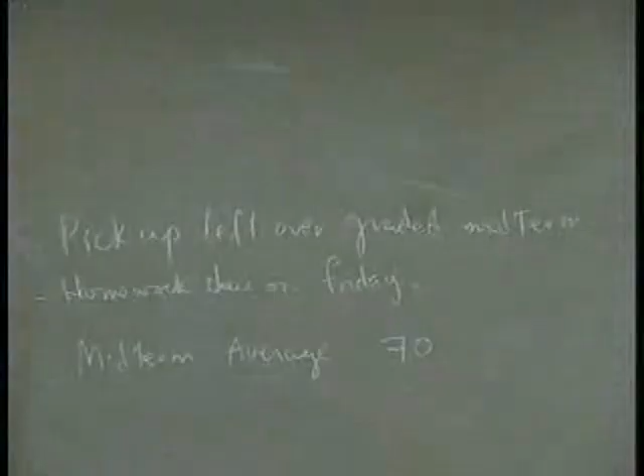Fartin. Sirit. Sahuratin. Secret, no, okay. Valerie Chang. Amin. Mitchell Cow. Mingong Kim. Andrew Chang. Stephen Lanziera. Radford Big Zhuang, Radford Ray Wang. Liying Chang. Liying Chang, Portia Jones. That's you? Okay. Jingua Wang. Could you pass this on over there? Ted Lee. Sean Koo. Joyce Liang. Alan Gu.

Oh yeah, there's a two-part thing. You're right. Hey Cam.

There's one without a name. You never figured out who it is, did you? Or is it the person next to Aaron Floyd? Oh yeah, sorry, this is... that's okay. Aaron. Okay, Aaron Floyd.

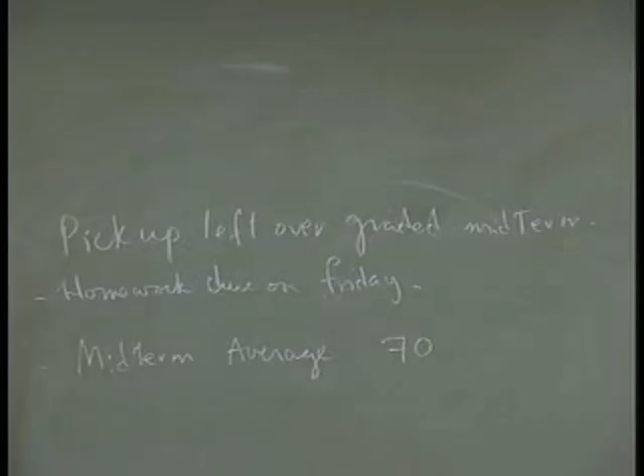Yeah. You're Tiffany, right? I don't think I read your name. Oh, what? Okay.

It's possible. Did anybody else by accident get Tiffany's? There's only one guy somewhere in the middle, like yours was not stapled. Did Tiffany's come with that? How did you have? What happened? Okay, don't have much of an explanation for that.

And this is your graded homework also. Okay, so I think that overall you did okay. I mean, there were times people didn't complain nearly as much as you did, and in previous times I taught the course, the average was still 70. In fact, 70 is right on - that's exactly how you want it to be. You don't want the average to be 95, and you don't want it to be 35. You want it somewhere between 60 and 80, or the 70 range. So I'm pleased with the results.

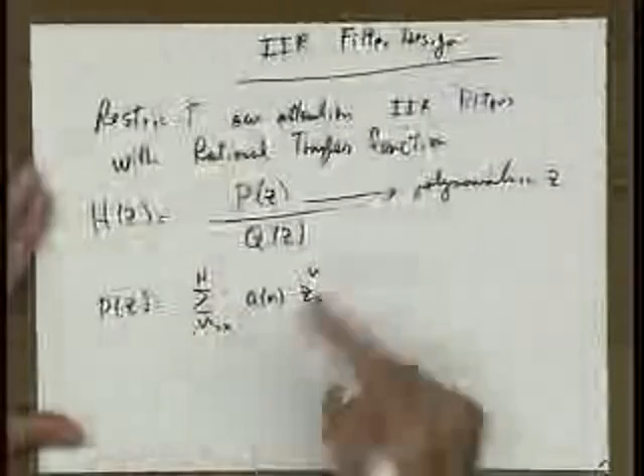So essentially, filter design reduces to this: where this summation is not infinite, this polynomial has finitely many terms, n equals 0 to capital N or something like that. Then the filter design reduces to determining these coefficients. Filter design is equivalent to determining these coefficients.

The same thing with Q. If I have Q of z is the summation over n of b of n z to the n, then I have to design A of n and B of n. That's an array of numbers.

What can we say in particular about designing these things? We're going to talk about two different techniques for coming up with A's and B's.

One technique is basically a direct technique of solving things numerically, so you stay in the discrete time domain, and I'll explain that in maybe 2 or 3 lectures from now. But the technique we're going to start talking about today is what's referred to as the transformation technique.

As I said in the last lecture, what it boils down to is reducing the problem to an analog IIR filter design, and then converting that analog filter into a digital filter. There are 2 classes of transformation techniques: impulse invariance, and bilinear.

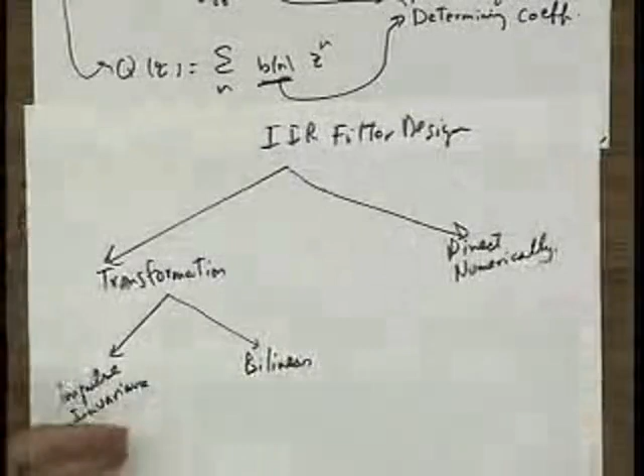Today I'll talk about impulse invariance. Probably on Friday I'll talk about bilinear, and then we'll move on to the direct numerical technique.

So before moving much further, let me outline the 4 steps. Let me talk about the transformation technique in generality before I dive down into the details of how impulse invariance and bilinear techniques work. There are really 4 steps to the transformation technique. Step 1 is that you're given a certain set of digital filter specs.

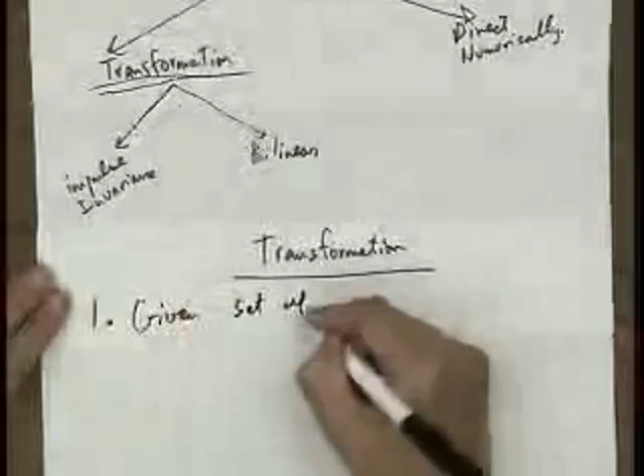Given a set of specs, and remember I use digital interchangeably with discrete time, so digital and discrete time here mean the same thing. So I'm given some sort of a filter spec in the discrete time domain, and the second step involves transforming these specs from discrete time to continuous time.

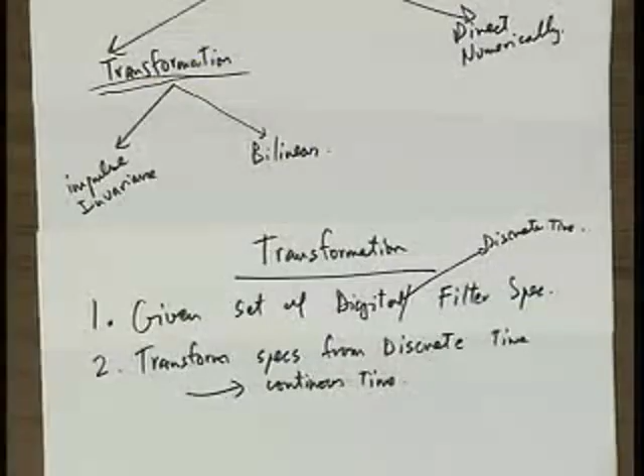So I'm going to transform the specs from discrete time into continuous time, that's why it's called the transformation technique. Now I have a set of specs in continuous time, and I go ahead and design an analog filter in continuous time. So I'm using the word analog and continuous time interchangeably here. We want to design a continuous time IIR filter, which is the same thing as an analog filter, which I call H sub A of S, and A here stands for analog. Continuous time and analog have the same meaning.

I think I've already gone over this discussion as to what are some techniques people use to design a continuous time filter—what are some implementation ways of designing analog filters. We went over RC design. You can have passive circuits, you can have active circuits. Active circuits are the ones that have transistors, and transistors can be put together to have op amps. So you can design your analog filters using those type of things, or using R's and C's.

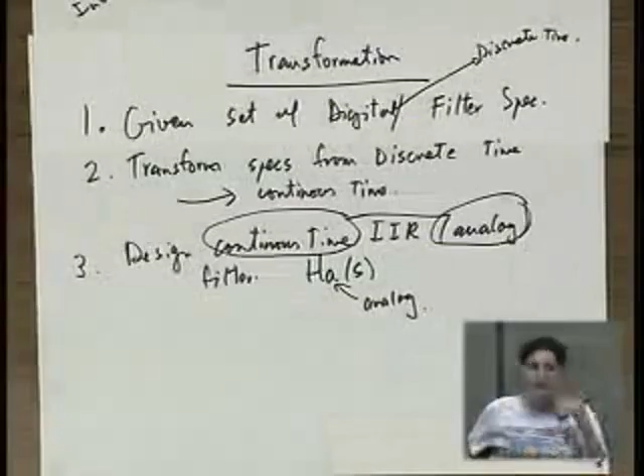And actually, we have a sizable number of mechanical engineers in this class. You can also have mechanical filters, right? Who are the mechanical engineering folks? Maybe you can raise your hand—I won't call on you specifically, just to know whether we have any. We do have 3 or 4. But what are some ways of designing filters in mechanical filters?

What is the equivalent of RLC—resistors, capacitors, and... Yeah, mass. What's it? I know about springs, but what's the other thing? Dampers. And what else, boxes, you said? No, it's mass, springs, and dampers. Oh, all right. So could you relate that maybe to RLCs?

So a damper, we hear from this end of the room, is equivalent to an inductor. A mass is equivalent to a capacitor, and a spring is equivalent to a resistor. So you can have mechanical sort of filters, right? Does that sound right? Actually, I don't know.

A damper is a loss element, so it's equivalent to a resistor. And a mass is a storage element, so it's a momentum storage element. I'm guessing it might be an inductor. I'm not sure though.

Well, in electrical engineering, an inductor and capacitor are both storage elements. One stores current, the other stores charge. Well, one of them resists having its voltage changed instantaneously, which is the capacitor, and the inductor resists having its current change instantaneously. So in that sense, they're both storage elements.

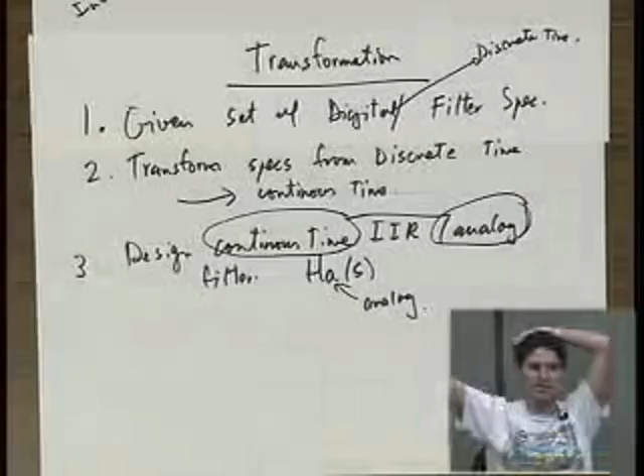But one question I have, maybe the mechanical engineering folks can clear up for us: in electrical engineering, input voltages go in and an output voltage comes out. In mechanical engineering, what are the typical examples of input and output? Is it some sort of motion goes in and motion comes out, or what is it?

Force as excitation goes in, and what comes out? Displacement and velocity as the response. Actually, it's the other way around, because usually if you say a voltage is across something, a velocity is also across a system. Current is through a system, so force is through a system. Got you. Okay, very good.

So a lot of these concepts cross over from electrical to mechanical engineering. There's a body of knowledge about how to design these analog filters, and once you have your analog filter, you can transform it into this discrete time filter H of Z. This is a transformation from continuous time into discrete time, in other words, from the S domain to the Z domain.

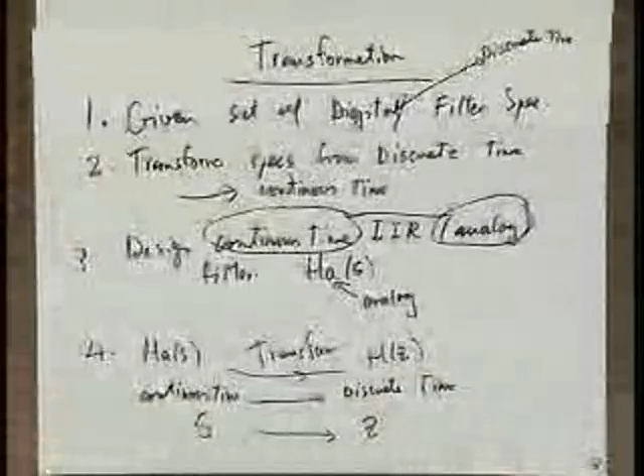So before I dive into the details of this and give you examples and clarify this page, I want to spend a minute talking about continuous time IIR filters. As I said earlier, when I was an undergraduate, there would be an entire quarter or maybe two quarters worth of class on continuous time IIR filter design.

The classic book for it is Lam, and the professor was Hardy Martel, who at that time was a chain smoker. He would never put one out, he'd literally extinguish one and start the other. We never had a minute of no smoke, but those days are gone, and so is continuous time filter design. But the guy was very smart, anything you asked him, he had a catalog of all possible filters in his head, and things came out very rapidly. I wonder if he's still alive, with all that smoke, non-stop, in the lecture room too. In case you needed to know, I was a smoker too at that time, so I shouldn't judge. Maybe I became a smoker because of the professor, but let's not blame him too much.

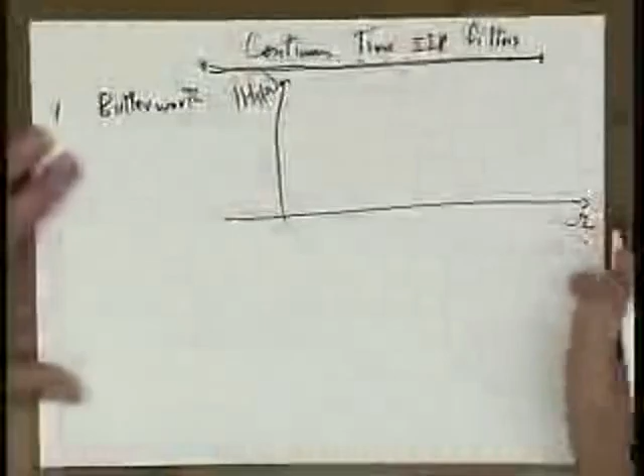Butterworth filters, Butterworth is the name of the guy who invented it. They are monotonic, meaning if I plot the magnitude of this analog filter as a function of Omega, using capital Omega to denote continuous time, it's monotonic in passband and stopband. I'm limiting the discussion to low-pass filters.

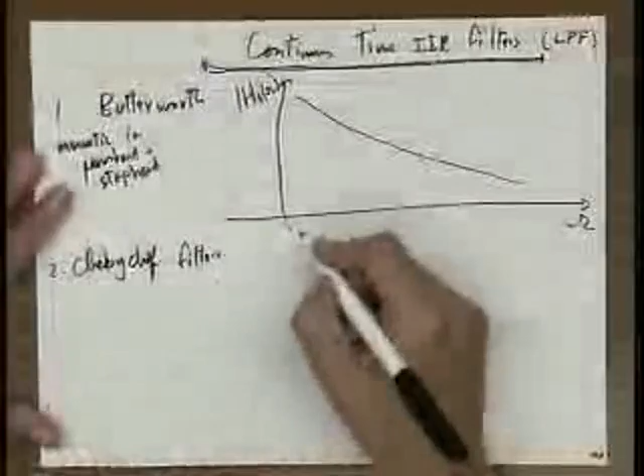The second category of filters are Chebyshev, the same Chebyshev we talked about with Chebyshev trigonometric polynomials and Chebyshev inequality, things that this Russian guy came up with. Chebyshev filters have a ripple in the passband or in the stopband, but not both. So they could have a ripple and then come down, or be monotonically decreasing in the passband and have a ripple in the stopband as a function of omega. This is magnitude of h sub a of omega. So they either have a ripple in passband or in stopband.

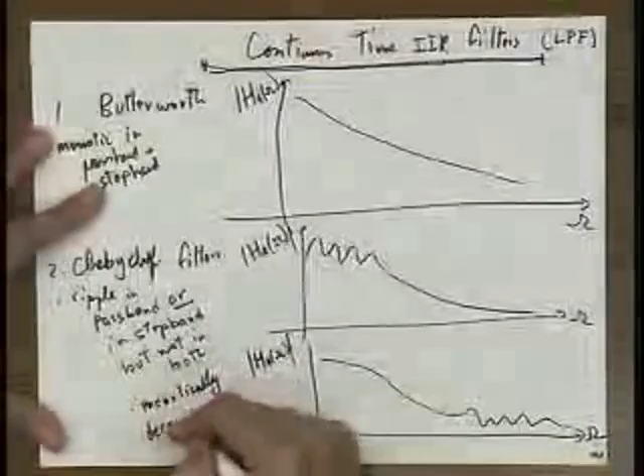But not in both. They're monotonically decreasing in the other. So if they have ripple here, they're monotonically decreasing there, and vice versa. Everybody knows what monotonically decreasing means: as omega gets larger, the value of h sub a of omega keeps getting smaller. There's a difference between monotonically decreasing and monotonically non-increasing. Non-increasing means it could remain the same value but not increase. But monotonically decreasing really does decrease.

The third category of filters, which we use for a lot of the examples in this course, is elliptic filters. In this case, you have ripple in the passband and in the stopband. So pictorially, h sub a of omega magnitude as a function of omega would look something like that.

So that's really all I'm going to say. Dan, I would urge you, please, in the discussion session, talk a little bit about this appendix and more details on these filters, the pros and cons, what their shapes are, and what their analytical forms are. I will talk a little bit in today's lecture on the elliptic filter.

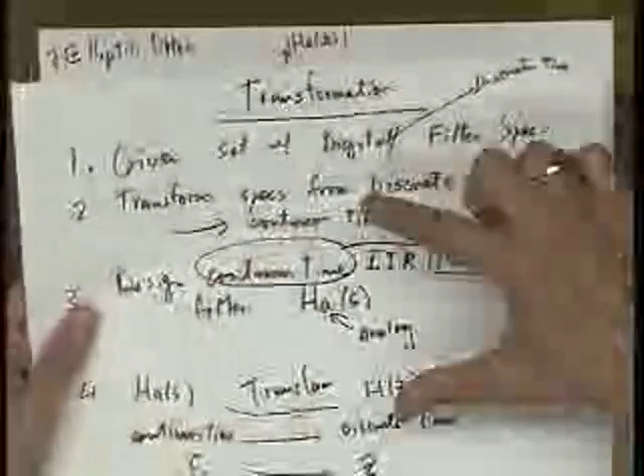Okay, next I want to move on to this page. Basically, this set of specs is given to you, you can't really do much about it. So the two things — I just talked a little bit about how you design an IIR filter, or what types of IIR filters there are. I didn't tell you how to design them yet. These two steps, step number 2 and step number 4, are coupled to each other.

In this step, you're transforming the specs from discrete time to continuous time, in other words from Z to S. And in this step, you're doing the reverse. So whatever you do here, you have to undo in step 4. Before coming up with specific proposals for how you do these transformations, I'd like to enumerate some of the desirable properties you want these transformation techniques to have, and I'll explain why we want them to have these properties. So, desirable properties of transformations.

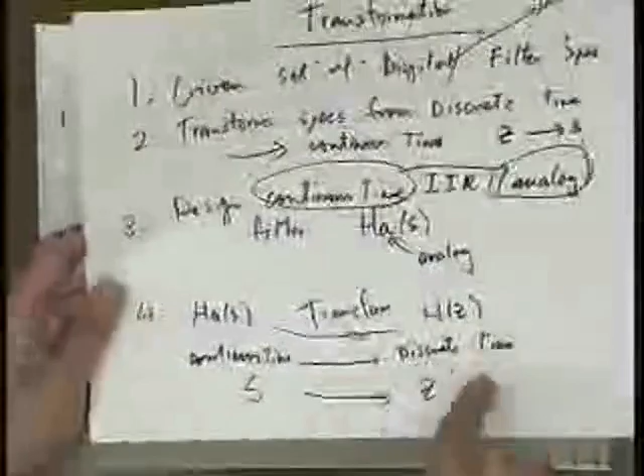There are basically three things we want out of whatever transformation we come up with. One, we want a causal stable analog filter to get transformed into a causal stable discrete time filter. Why is that desirable? Because if I design a causal stable analog filter, after I do this transformation, ideally I'd like to end up with a causal stable filter. If the transformation turns a stable filter into an unstable filter, I'm in trouble, because I don't want to design unstable filters. And if my filter in the analog domain was causal, I want it to also be causal in the discrete time domain, because that's a nice property to have.

So I want a causal stable analog filter — and again, I'm using analog interchangeably with continuous time filter — to get transformed into a causal stable discrete time filter.

So I want h sub a of s. If it is causal and stable, after I go through the transformation, I want my h of z here to be also causal and stable.

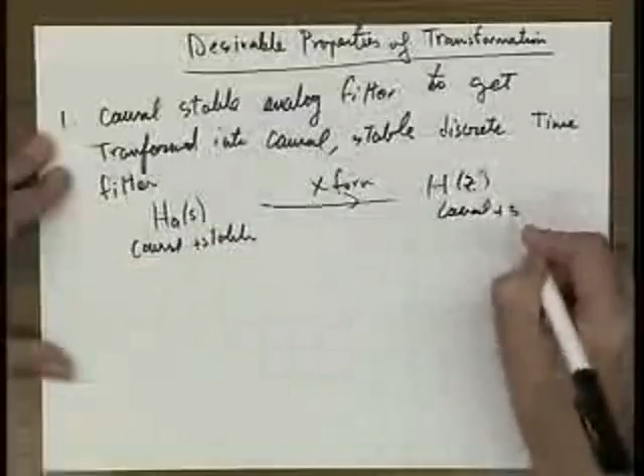That's what that means. The second property is that I want the j omega axis in the S-plane, S-plane meaning the S-plane as in Laplace transform plane, to get transformed into e to the j omega circle

in the Z domain. Okay? And why is it that I want that property to hold true? Well, the reason has to do with step 1.

Or rather, step 1 and step 2. Why? Well, because when I'm given a set of specs in the discrete time domain, usually I'm being told what my frequency response has to look like, in the discrete time domain. That means in the Z-plane, on the unit circle, I've been told what values should my filter take. Like between this frequency and this frequency, magnitude of h of omega should have this much ripple, should be between 1 plus delta and 1 minus delta, and in the stop band, between this frequency and that frequency, it has to take this value.

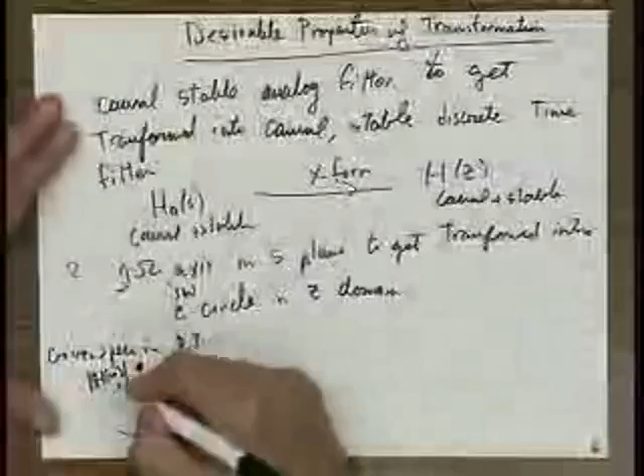So if I'm given some sort of specs in discrete time domain, in the little omega domain with magnitude of h of omega, I'm usually told, okay, in pass band, you can be between 1 plus delta, 1 minus delta, and in stop band, you can be between, this is omega p, this is omega s, your magnitude can be within delta 2.

But what is this? In the Z domain, essentially, if this is the unit circle, I'm being told that, from here to here, to have some certain sort of h of omega has to be between 1 plus delta and 1 minus delta, and let's see, and then from here to here, these are the high pass stuff, and so it has to take different values.

So this is the e to the j omega in the discrete time domain. I want this circle, after I do the transformation from S to Z or Z to S or whatever the reverse way is, by the time I go to the S domain, I want that to get mapped, this is the S plane, into this j omega axis.

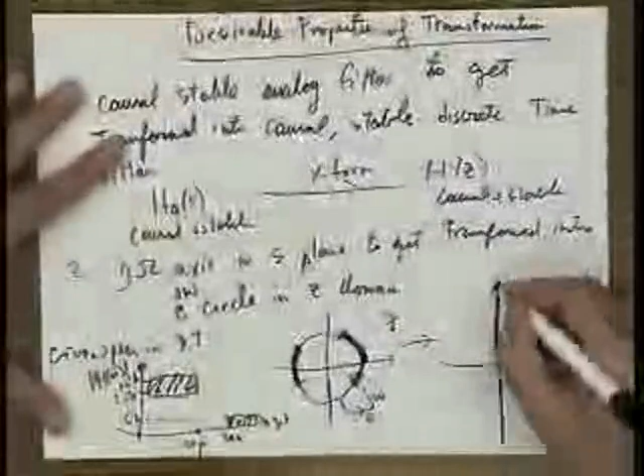This is sigma, and this is omega. Remember, S is equal to sigma plus j omega. This is all from EE120, right? Or EE20. So I want this circle, e to the j omega, to get mapped to the j omega axis. I want this to get mapped to the j omega axis.

And why is that? Well, because that's the only way I can translate these specs in the discrete time domain into specs. My analog filter design techniques work when I have a spec, when somebody has told me what the frequency response of the analog filter should look like. So if I want the specs here to get translated into honest-to-God specs in the S domain so that I can design filters, this circle has to map to this axis.

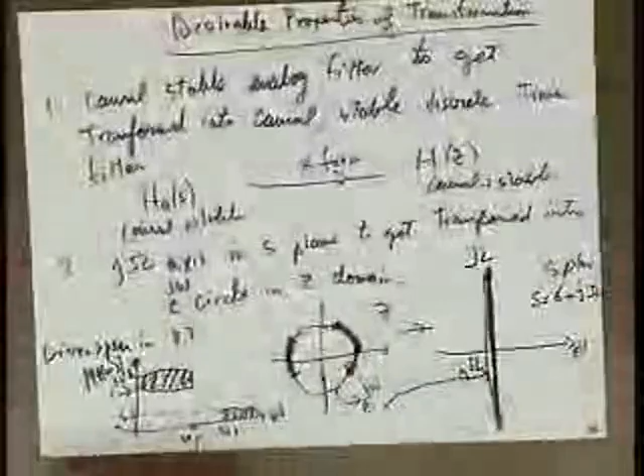Right? How can that happen? This unit circle has only magnitude 1, whereas the axis, the magnitude can vary. That's what the transformation does, and you'll see in a minute what potential candidates of transformations are that can do that.

Because in analog domain, at the end of the day, I want to end up with a frequency response spec in the analog domain, and the frequency response. The same way as in this discrete time domain, the frequency response of a filter is defined by its value on the unit circle. In the analog domain, the frequency response of a filter is defined by h of s evaluated on this j omega axis, right? You all remember that from 120?

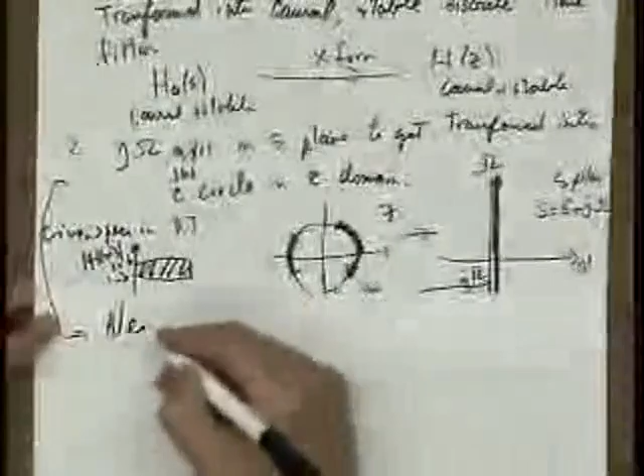Yeah? Okay. So the upshot of this thing is we need that. The reason for having, if you can include the top half of this thing. So we need this step 2 because we need this to translate specs from one domain to another. So these are desirable properties, and they might not exactly happen, but at least these are the things we would like this to have. So we want e to the j omega to get mapped to j omega. And this is in the z plane, and this is in the s plane.

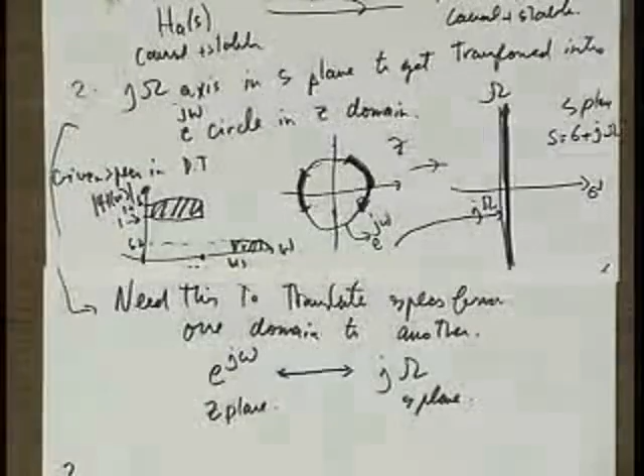And finally, the last desirable property of my transformation is that I want a rational transfer function in the S domain to transform to a rational transfer function in the Z domain, because at the end of the day, I want to be able to end up with a rational transfer function in the z-domain in order to be able to implement my filter. So you want your rational h sub a of s, or a rational analog filter, to get transformed into a rational discrete time filter.

H of z. And the reason for that is we want to use difference equations to implement our discrete time filter.

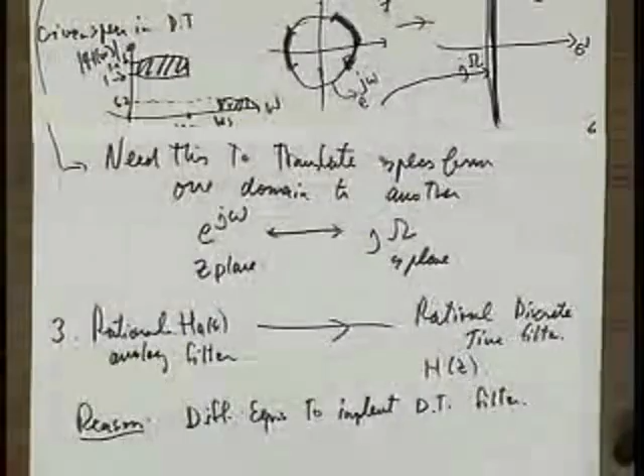If you end up designing a nice, good analog filter that's rational, but the transformation from S to Z doesn't give you a rational transfer function, that's a problem. For example, let's say Z is equal to square root of S. If you have a transformation like that, it would not preserve this property.

So we're going to get rid of possible transformations like that. On the other hand, if you have Z and S related in a rational transfer function way, in other words, Z is some polynomial in S over some polynomial, if you have a transformation like that, it'll probably hold true. We'll see that in the next lecture when we talk about bilinear transformation, which essentially does something like this.

So having laid out these desirable properties, let me just make everything concrete and propose an actual transformation. Here is the impulse invariance transformation as a candidate.

What's the basic idea? The basic idea is this: I have an analog filter H sub A of S, and that corresponds to impulse response H sub A of t. This is all continuous time. I want to come up with a transformation here that gives me H of n.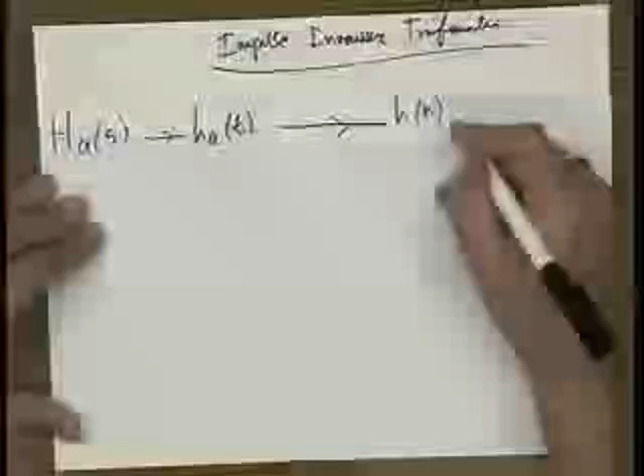The transformation I'm going to use is such that I start with H sub A of t, and I sample it at t equal to n times T, some sampling period T, and that's my H of z. So essentially what this impulse invariance transformation does, just like the name says, is make sure the impulse response remains invariant. I want the impulse response of my discrete time filter to be a sampled version of the impulse response of my continuous time filter.

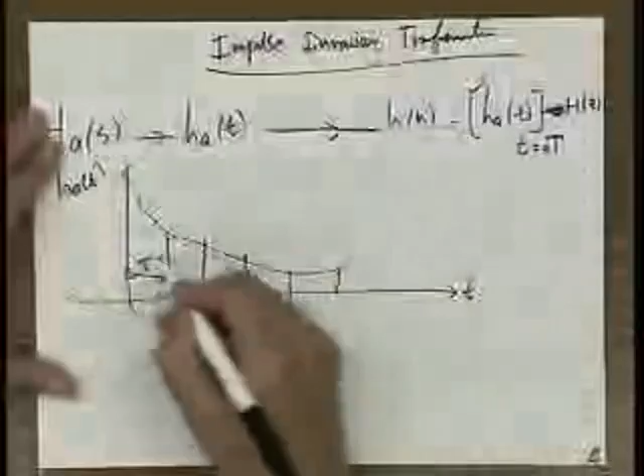So that's my proposal. If I have, as a function of t, H sub A of t that does something like that, then I go ahead and sample it at T intervals, and from that I get an H of n, and that's how I do the transformation.

So let's take a few minutes to check to see if this proposal, this approach, or this transformation, if you will, satisfies those three conditions that we just talked about a second ago. Does this satisfy the desirable properties? Notice that I'm calling it desirable but not mandatory, and you'll see in a second why. Let's just check it over.

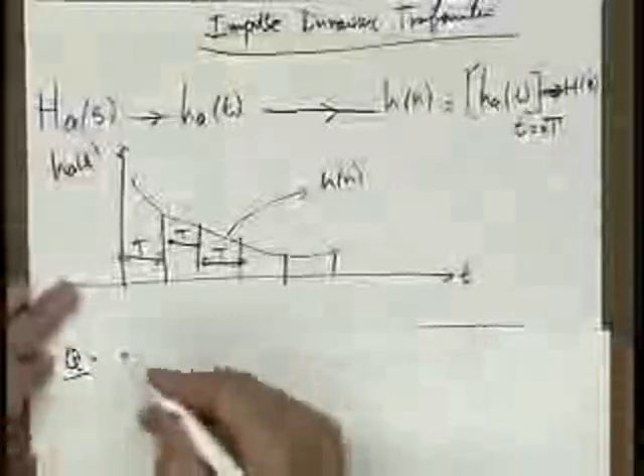Question 1 is, does causal and stable H sub A of S translate into causal and stable H of z? Does it or does it not?

Well, if I write H sub A of S as summation over k of A sub k over S minus S sub k, I'm just writing down the partial fraction expansion, expanding H sub A of S in terms of a sum of simple terms, or if you will, this is just a parallel implementation of H sub A of S. Nothing really fancy. So assume H sub A of S is of this form, and assume that this is stable.

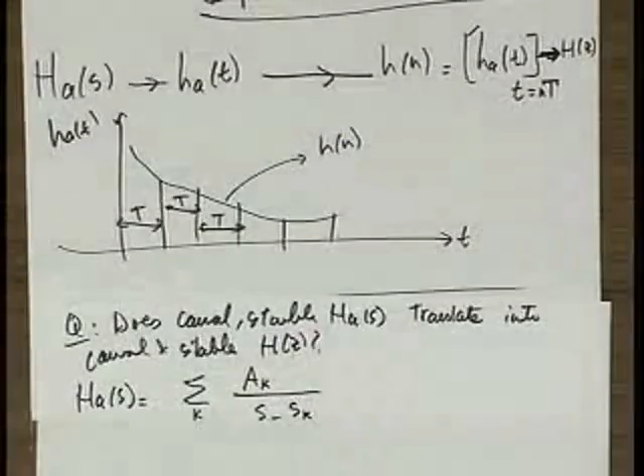What does it mean for an analog filter to be stable if it is causal? Assume it's stable and it is causal. What does that mean in terms of the S sub k's, for example? The poles are in the left half plane. That means if poles are in the left half plane...

Mathematically, that means the real part of S sub k is smaller than 0. S sub k is a pole, it has a real and imaginary part. So if this is the S plane, and this is S sub k, when you say it's in the left half plane, this is the real part and this is the imaginary part. That means this is the right half plane here, and this is the left half plane here.

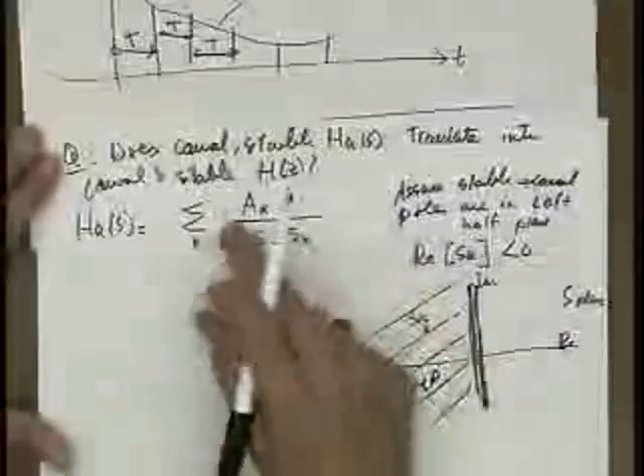So we mean the real part of s sub k has to be smaller than 0. That's the same thing as being in the left half plane. So let's assume that, and see if this proposed transformation results in a causal, stable, discrete time filter.

Well, if h sub a of s is like this, what can we say about h sub a of t? We can take the inverse Laplace transform, and because we know it's causal, we know the region of convergence, so the answer is going to be a bunch of right-handed things. So h sub a of t is the summation over k of a sub k e to the s sub k t, u of t. Here I'm exploiting the causality assumption.

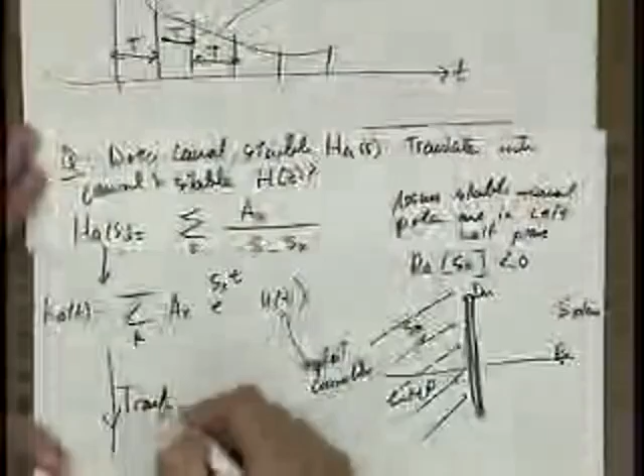Exploit causality. Remember, I'm assuming it's stable and causal in the analog domain. I want to show that with this transformation, it will be stable and causal in the z domain. Now I apply the transformation. If the transformation is any good, it's going to result in an h of n that's also causal and stable.

So what is our transformation? Go to the analog filter, sample it at t equals nT. So h of n is h sub a of t sampled at t equals n times capital T. That's the transformation. Just replace all the t's with n times capital T in this equation. It's summation over k, a sub k, e to the s sub k, with t replaced by n capital T, and u of t replaced with nT becomes just u of n. Okay, so that's what the transformation does to an analog filter of that form.

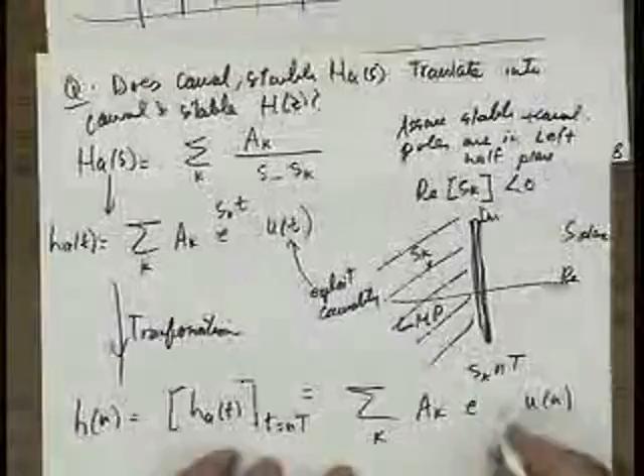First of all, is this new impulse response causal? It certainly is, because it's got this u of n. So this is causal. So we have one check mark.

Do you have a question? It's just that you're assuming that all the poles are distinct. It doesn't assume any multiplicity, because if you do, then probably a t factor will come in. Then you probably have a time varying system. It doesn't make it time varying. Why would it make it time varying? If you have double poles, it doesn't make a system time varying. No, but when you say nt, instead of wherever you put e to the power sk nt, you'll have an nt times e to the power sk nt. Is that okay? I'm just curious about it.

That certainly doesn't make the system time varying. Let's agree on that. If the impulse response becomes t times something or n times, the concept of impulse response only exists for LTI systems. But coming back to your question, does it mess anything up? It doesn't, because even if I have an n times u of n, it still preserves causality. So you're right, I didn't write down the most general case. I could have put double multiplicities of poles. It would have made this argument a little more complicated, but the conclusions would have been the same.

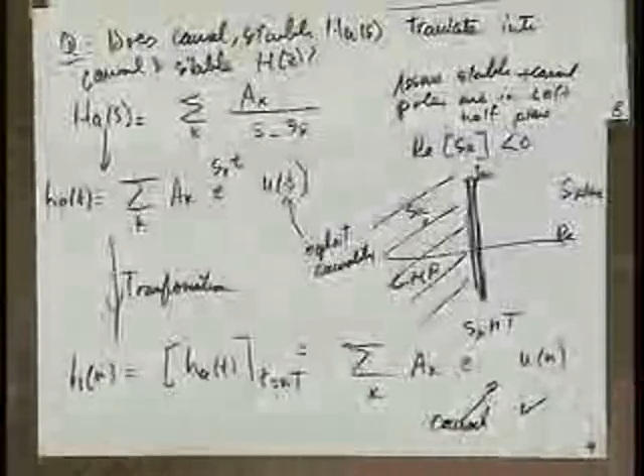So because h of n looks like this, it's still causal. So hallelujah, we have one nice property. Now, is this also stable? Is this filter also stable?

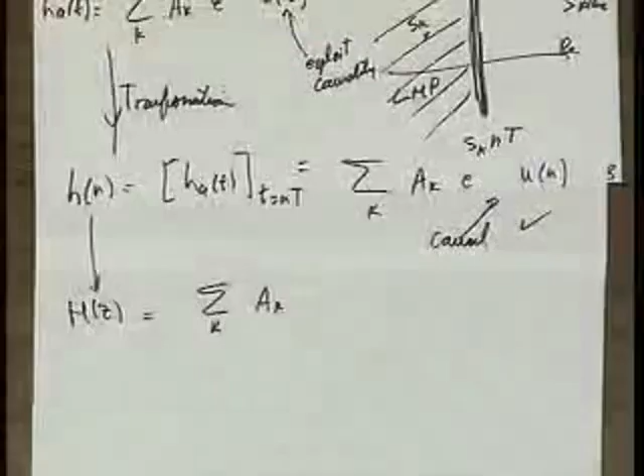Well, to check stability, the easiest thing to do is to take the z transform of this. So if I take the z transform, I get H of z, and since the z transform is a linear operator, I can say it's a summation over k of a sub k. And this is the easiest thing for us to take a z transform of, because it's of the form a to the n times u of n. What's a? It's e to the s k T. So we know how to do the z transform of a to the n u of n. It's 1 over 1 minus a z inverse. In fact, that's the only thing we know how to do the z transform of in the universe.

So it's 1 over 1 minus e to the s k T z inverse. That's the z transform of this part. Well, is this stable?

Well, what are our assumptions? We assume the continuous time filter was stable, in particular that the real part of S sub k is smaller than 0. Because of that, what can we say in general, if a filter is stable? In the discrete time domain, if it's already causal for stability to be true, the poles have to be inside the unit circle. And what's the pole here?

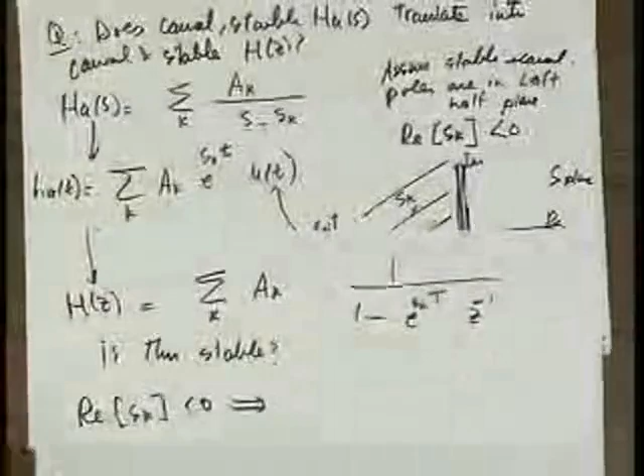It's e to the SKT. So is this inside the unit circle? We have to check the magnitude of e to the SKT. So the question of whether this is stable or not translates into: is the magnitude of e to the SKT smaller than 1? Is it or is it not?

And why is it? Because the real part of S sub k is smaller than 0, it's a negative thing, and t, the sampling interval, is always positive. So you have e to the power of something negative, and therefore the magnitude of it is always smaller than 1. So because the real part of S sub k is smaller than 0, we can conclude that e to the S sub kt is smaller than 1, which means the poles are inside the unit circle, which means we have stability.

Okay, so let's summarize this. We showed two things in this whole analysis. We showed that causal and stable in analog got transformed into causal and stable in discrete time. And also we showed one other thing in this process - what is it? H sub z looks like this, and what was the third desirable property? We wanted a rational transfer function to map into a rational transfer function, right?

So did we show that? Yeah, we started off with H sub a of s looking like this, and we ended up with H of z looking like this. So we also showed that a rational transfer function in analog got transformed into a rational transfer function in discrete time. So we showed two desirable properties.

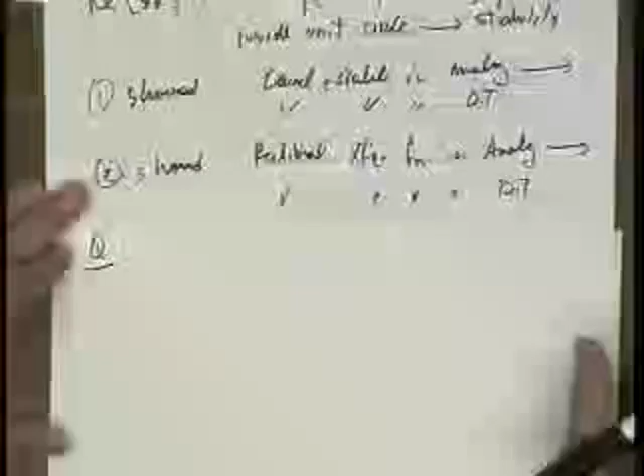And now the last property I want to talk about is the j omega axis. Does the j omega axis map into the e to the j omega circle? Is there a mapping between those two things? So now the remaining question is - could you shift? Okay, I'm going to move myself. Thank you. The remaining question is, does the j omega axis in the S plane get mapped to the e to the j omega circle in the z plane?

And what do you think the answer to that is? Anybody? No, actually, you should know the answer to it precisely. In what way? This is my transformation - stare at it. Where is it? Page... here. This is my transformation. I'm just sampling my h sub a of t at equally spaced points.

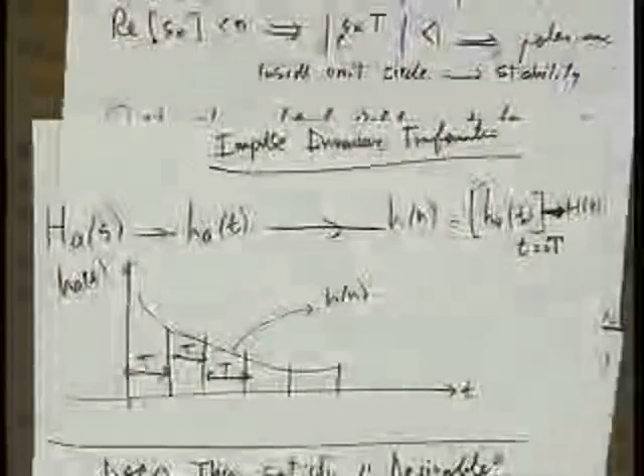So do we know how this frequency response h of omega is related to the continuous time frequency response h of omega? In general, if I have a continuous time function and I sample it at t, which is what I'm doing there, do I know the relationship between those two Fourier transforms? Yeah, that's the first thing we did in class like 9 million years ago at the beginning of the semester, right? And what is that relationship? That's like old news almost.

What is that relationship? Well, if I'm doing h of n as h sub a of nT, if I'm sampling this, then I can say that h of omega, the discrete time Fourier transform of this, is the replica of this thing summed over - it's 1 over t, summation over r, h sub a of omega over t minus 2 pi r over t. That's the thing from the beginning of the semester.

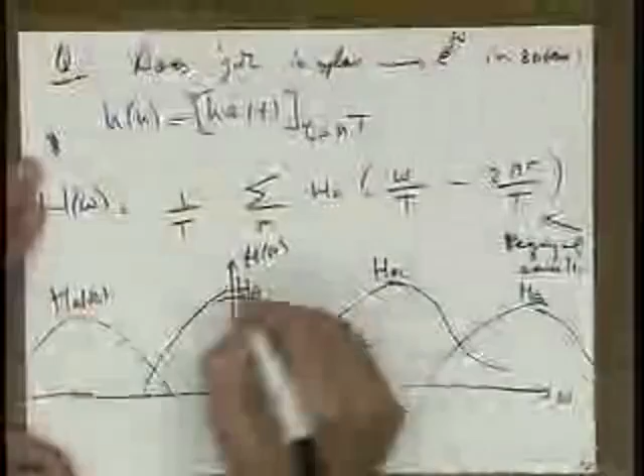So can I easily then - what does it mean pictorially? Well, it means that h of omega as a function of omega, if I were to plot it, is these h sub a's, just repeated.

And so can I then, if I have some sort of specs in the discrete time domain, translate it into h sub a? Is there a one-to-one mapping between the specs in the discrete time domain and analog domain? There could be if there's no aliasing. So the question is, can I translate the specs? And the answer is there could be if there is no aliasing.

Or if the aliasing doesn't interfere quite a bit. And what if there's a little bit of aliasing?

When translating my specs from the analog domain to discrete time and back, I don't exactly translate them - there's a tiny bit of imprecision. That means if I design my filter in the analog domain to satisfy the specs, by the time I translate it to discrete time, it could be a little off. But does the technique entirely fail? No. If I'm off a little, I might still satisfy the specs anyway, or I could jack up the order of the filter slightly to make up for the aliasing introduced. It's not a total disaster, just a little inconvenient - the same way window design was inconvenient because we could never be 100% sure we satisfied the specs.

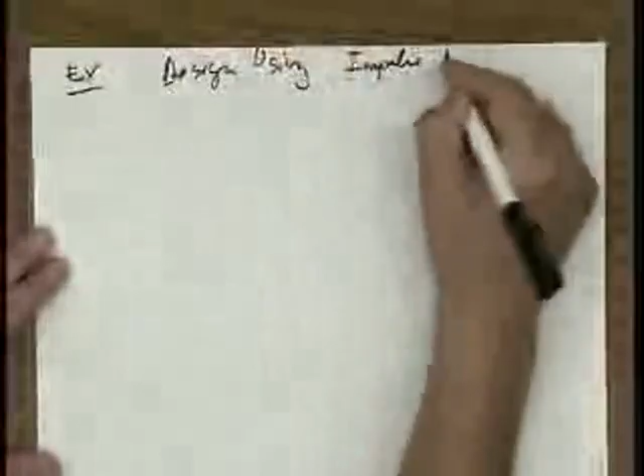So to put all of this in perspective, let me give an example of IIR filter design using the impulse invariance technique, to make things more concrete. Here's an example: design using impulse invariance. I might need a textbook to show some pictures - I didn't bring mine, but let's go over the example.

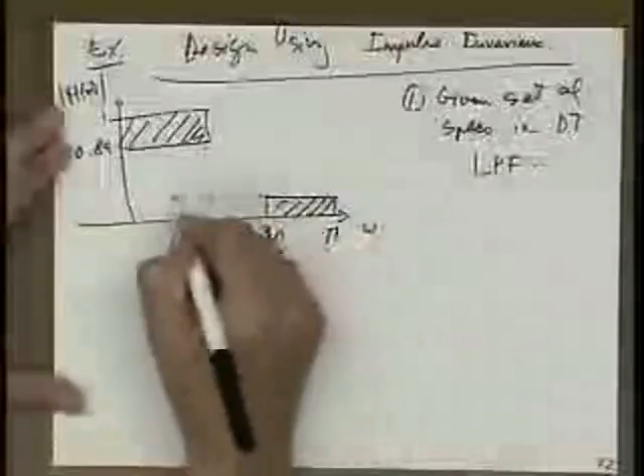Suppose I'm given this set of specs, in discrete time domain, not analog, and I want to design a low-pass filter. I have a magnitude of h of omega. It has to be between 1 and 0.89 in this region, all the way to omega equals 0.2 pi. Then from 0.3 pi on all the way to pi, I want the magnitude to be no more than 0.177. This is something that's come up because you designed your system, somebody gave it to you, etc. So magnitude of h of omega should be smaller than or equal to 1 and 0.89 for omega between 0 and 0.2 pi, and smaller than 0.177 for omega between 0.3 pi and pi.

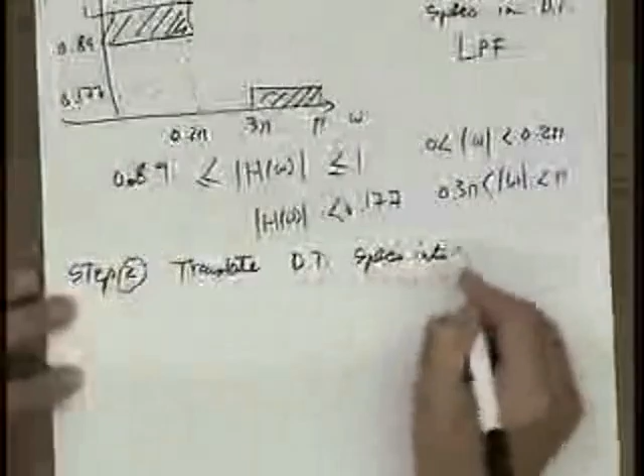So that's step 1 - somebody has given us the specs. Step 2, we want to translate these specs into continuous time space.

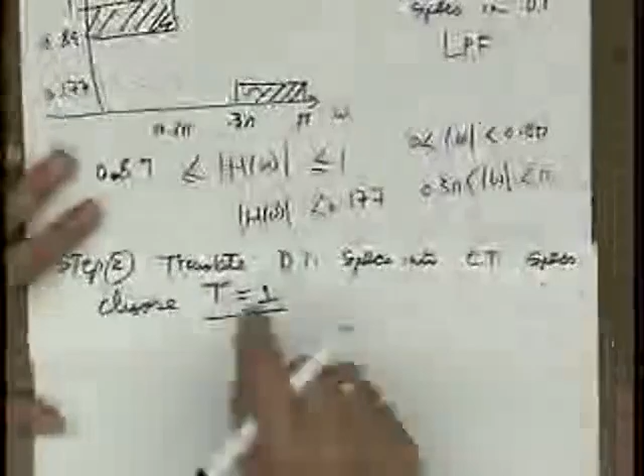How do we do that? Let's choose T equals 1. I'll make a claim that 99% of the time when I teach this course comes across as extremely anti-intuitive, and I spend a lot of time convincing people it's true: it doesn't matter what value of T I pick. I can pick 1, 2, or 3. As long as I choose the same T in step 4 of the filter design, when I go back from S to Z domain, I always get the same answer. Students always get tripped up on that - they think T matters and makes a difference. It just doesn't. You can pick any value, as long as you're consistent and use the same T in step 4, you get the same answer. But let's just do this step.

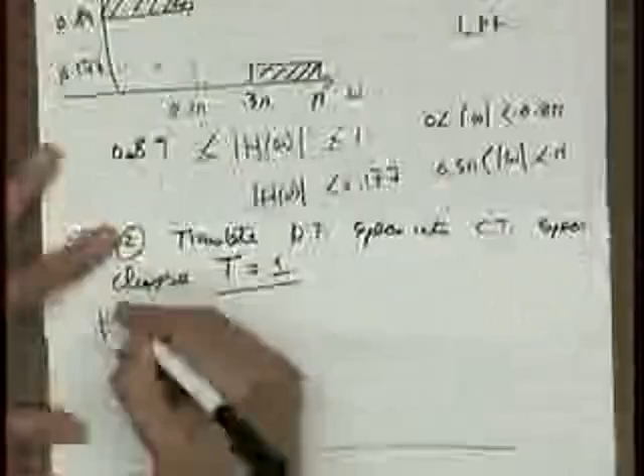If T is equal to 1, how can I translate the specs from discrete time to analog? My h of omega is supposed to have this set of specs, and I pick T equals 1 - that means there's absolutely no scaling of the omega axis going on. Remember, there's a scaling factor of capital T between little omega and big omega from way at the beginning of the class? If I pick T equals 1, little omega becomes the same as big omega, and the specs translate exactly. My specs in h sub a of omega will be identical: between 1 and 0.89 for capital omega from 0 to 0.2 pi, and from 0.3 pi all the way to infinity - remember, capital omega doesn't have a pi limit, it goes to infinity - it has to be 0.177. So because I picked T equals 1, omega got translated directly into big omega - this becomes my spec in the continuous time domain.

And if you pick T equals 2, there will be a scaling factor - this would become 0.2 pi divided by 2, which is 0.1 pi, and everything gets scaled. But for convenience, we just pick T equals 1.

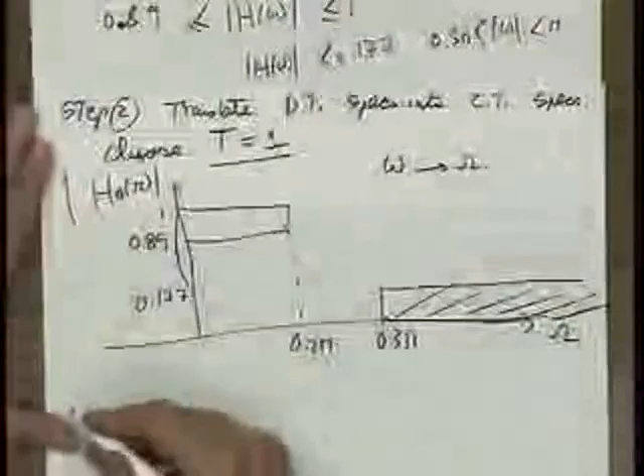Now let's go to step number 3. We translated the specs, so now step 3: design the continuous time filter that satisfies this spec. We're going to design a Butterworth filter, which is monotonically decreasing in the stop band and pass band. How are we going to design it? Well, because the Butterworth filter is monotonically decreasing, it just does that.

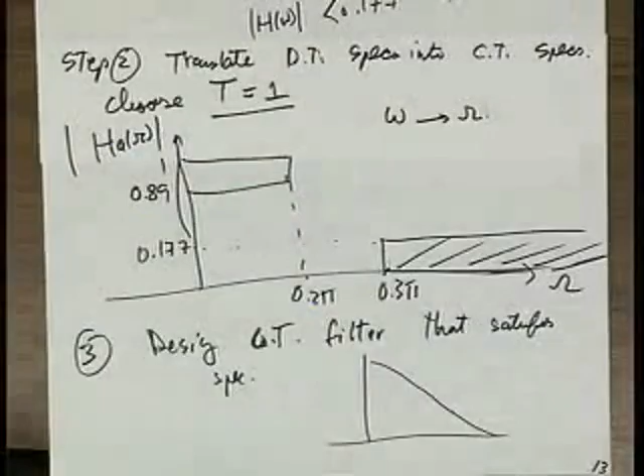Ideally, you want to design a Butterworth filter of a very low order. Same as in FIR filter design, you want to minimize the number of coefficients, the amount of delay, and the amount of computation. In IIR filter design, both continuous and discrete time, you want the lowest order filter that satisfies your spec, because a high order filter means a lot of A of n and B of n coefficients. You want order n to be small so you have minimum delays, summers, adders, and other junk. So you want a low order filter.

To design a low order filter, given that the Butterworth filter monotonically decreases, what's a good set of constraints to impose? A good set is to have it start here, go through this point, go through this point, and go down. In other words, impose that my Butterworth filter passes through 0.2 pi at the 0.89 value, and that its magnitude at 0.3 pi is 0.177.

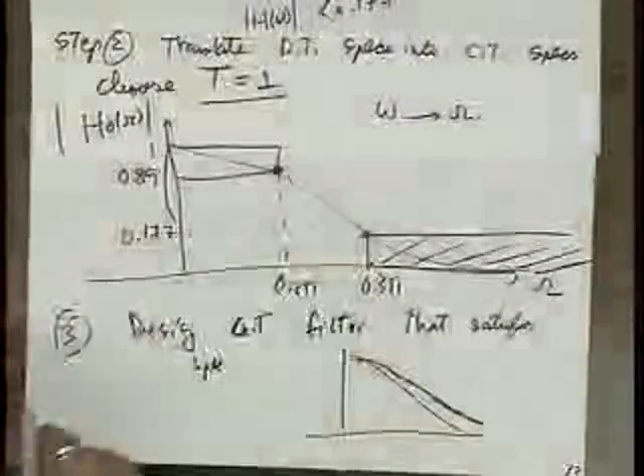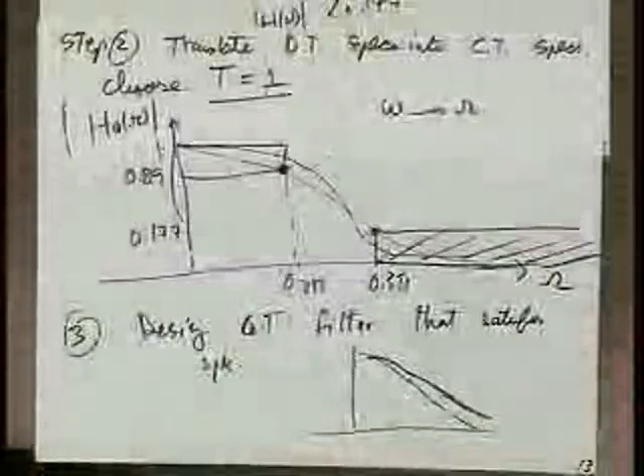Why is this a good idea? If instead I have it go through not this point but something higher up, still within spec, and not through this point but something lower down in this range, it will have to have a sharper transition in the same frequency range, between 0.2 pi and 0.3 pi. It has to drop more. From red to red, it only drops this height; from blue to blue, it has to drop this height, which is larger. So in the same transition width, if it has to drop faster and larger, what results? A tighter spec, a more difficult spec. The more brick-like your specs are, the higher the order of filter needed to satisfy that spec.

We want to avoid a high degree filter. We want the lowest degree filter that does the job. For that reason, I'm going to be as lazy as possible, putting the minimum amount of constraint on my filter, giving it the least amount of drop. So I'll force it to go through the lowest point in the passband and the highest point in the stopband. Is that clear? Okay, let's come back here.

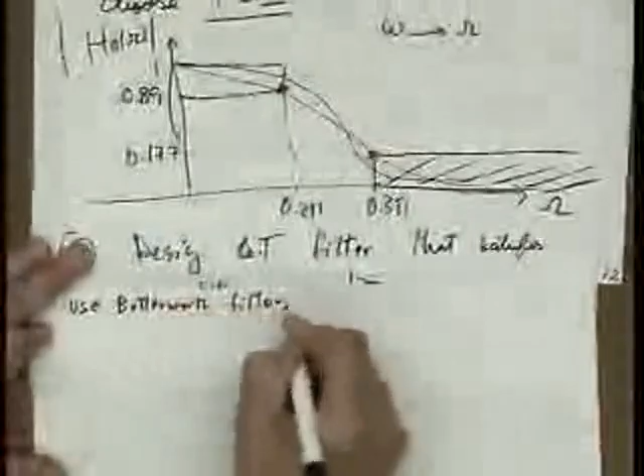To summarize, my goal is to use a Butterworth filter, and to minimize the order I will impose the following: the magnitude of h sub a of omega at omega equals 0.2 pi is smack at the lowest value allowed, 0.89. I'll also impose that the magnitude of h sub a of omega at omega equals 0.3 pi is smack at the highest value it can be, so that I minimize the transition drop in that 0.2 pi to 0.3 pi region.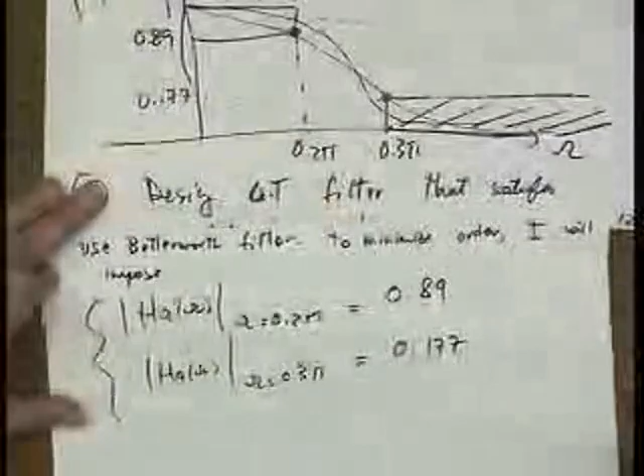So what does that mean? What do I know about Butterworth filters? I never explained anything about them - I think I skipped two pages. But now it's time to give a two-minute tutorial on Butterworth, not margarine-worth, but Butterworth of order n. How does it look?

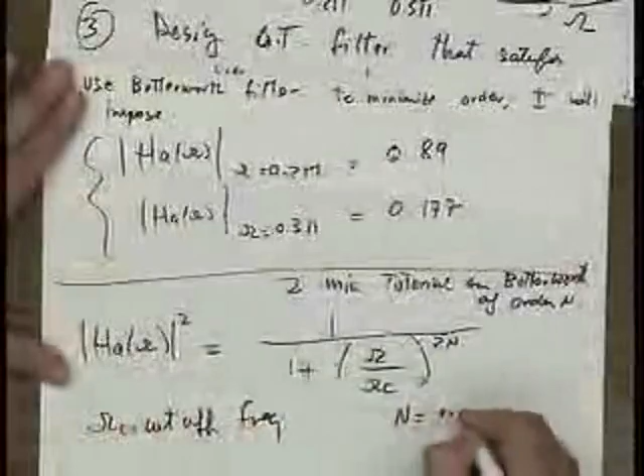What we know about Butterworth filters is that the magnitude squared is of this form: 1 over 1 plus omega over omega c to the power of 2n. Omega c is the cutoff frequency, and n is the order. If I plot h sub a of omega, it's not only monotonically decreasing, but as n increases, the transition becomes sharper and sharper. As n gets larger, this thing becomes sharper and sharper. And where do the poles and zeros of this Butterworth filter look like? So this is a tutorial on Butterworth.

So how do the poles and zeros of this thing look like? Well, here's how it looks. This is the S plane, this is sigma, and this is omega. Remember, S equals sigma plus j omega.

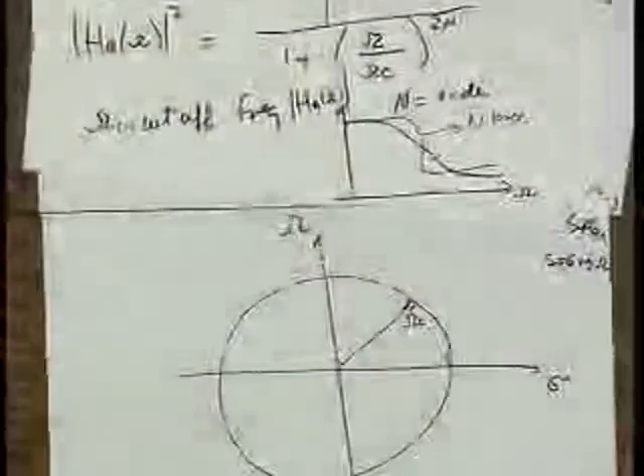So the poles of this guy are on a circle of radius omega c, apologies for not drawing a good circle. And if I have, for the sake of example, n equals 6, can you go up just a tiny bit? Then this guy is going to have 12 poles uniformly spaced around this circle.

So 360 divided by 12 is 30, so they're 30 degrees apart, and I'm going to have 12 of those, but this is magnitude squared. The actual Butterworth filter only has the poles in the left half plane to make it stable, right? So let's put 12 dots around this circle, each one 30 degrees apart.

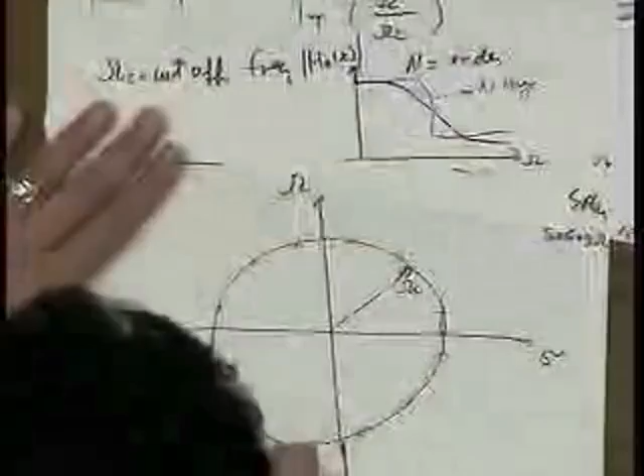So it'll be here, here, here, here, here, here, here, here, here, here, here, or maybe here, not that one, and here. Okay, so these are all 30 degrees apart. The Butterworth filter, the poles of the Butterworth filter, are all the ones on the left-hand side. Those are the poles of the Butterworth filter. So they're 30 degrees apart.

So this is all the tutorial I was ever going to do on Butterworth filters. Coming back, end of tutorial, coming back to this equation here that we have.

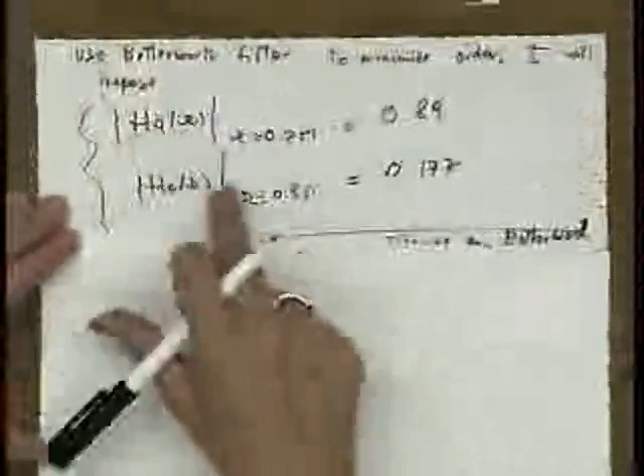So we decided, back to the example, we wanted this guy to pass through, remember, we wanted H of omega to pass through this point, and that's how it got translated. Now that we have a nice expression for the Butterworth filter that looks like this, we can plug this in and write that down. So what can we say, combining this guy with that guy, what can we conclude?

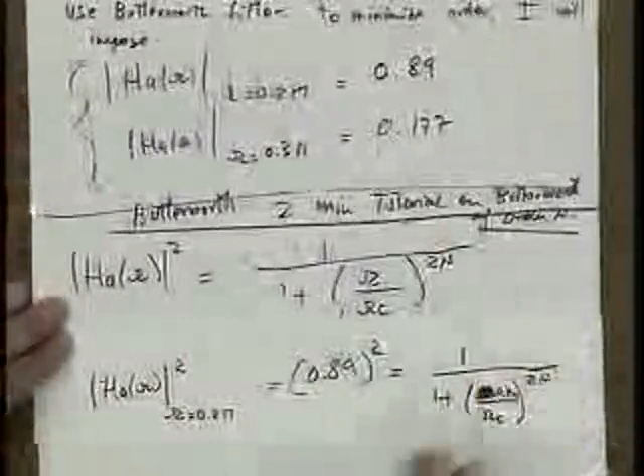We can say that H sub a of omega squared at omega equals 0.2 pi is the same as 0.89 squared, which is the same as 1 over 1 plus omega over omega c to the power of 2n, evaluated at omega equals 0.2 pi. Instead of omega, I put just 0.2 pi, because I'm using a Butterworth filter, and that's the expression for a Butterworth filter.

So that gets translated into this, and this second one gets translated into this. H sub a of omega squared at omega equals 0.3 pi is equal to 0.177 squared, equal to 1 over 1 plus. Now what's the omega here? We're evaluating at 0.3 pi, so replace this omega with 0.3 pi over omega c to the power of 2n.

So these two specs from up here got translated into these two. They're not specs really, that's the fact that it's a constraint we imposed. We decided that our H sub a of omega has to pass through this point, and that point translates into that. So now what do I have?

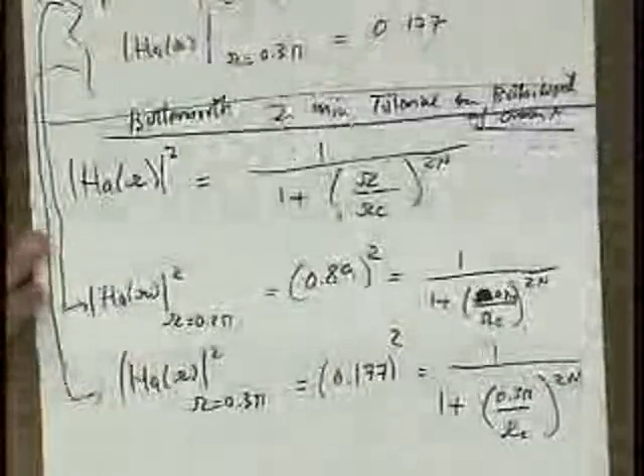I have a system of two equations and two unknowns. It's not really a linear system of equations, but even if it's nonlinear, because there are so few unknowns and so few equations, I can just solve it in some sort of numeric way. So I can say two equations plus two unknowns.

And what do I get when I solve this? I get n equals 5.88 and omega c equals 0.704. And because n is the degree of my Butterworth filter and it has to be an integer, I'm going to round that up to n equals 6. So n equals 6 and omega c equals 0.704.

Well, I'm sorry, so you got n, you increase n. Sorry, you increase n to 6, okay, because you can't have a fraction. You round it up because 5.88 is so close to 6. We picked n equals 6.

Now, I could use n equals 6 with this omega c, but that's overkill, right? So I have to somehow figure out what the new omega c is. And I have two ways of doing this. What are the two ways? I can either plug n equals 6 here and compute omega c from this equation, or plug n equals 6 here and compute the new omega c from this equation. And which one do you think I should do, and why?

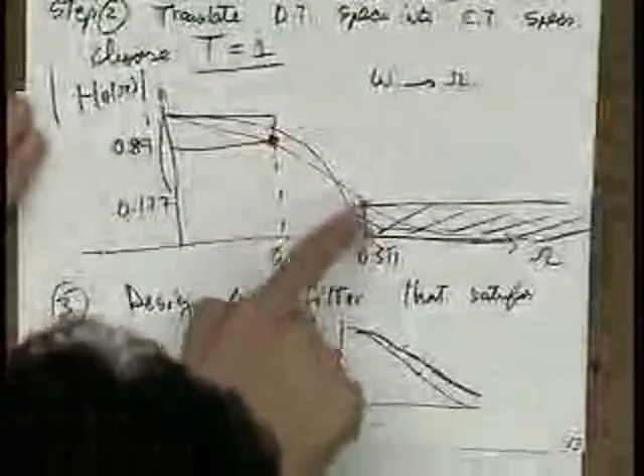If I plug n equals 6 here and compute the new omega c, I'm enforcing that at 0.3 pi I pass through this point. The fact that I've jacked up my n from 5.88 to n equals 6 means I'm somehow over-satisfying the specs. So which is a better way of over-satisfying the specs: to pass through this point and go a little lower here, or to pass through this red point and go a little higher up there?

It really depends on whether you need a flatter passband or more rejection in the stopband. But it also depends on something else I talked about — the aliasing argument.

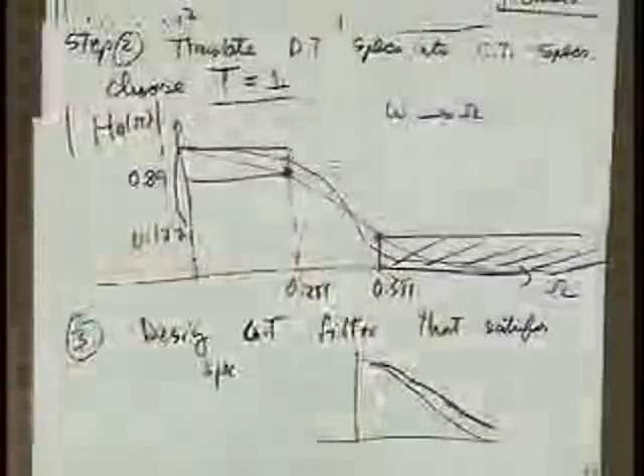If you don't want aliasing, or want to minimize it — remember I talked about that a few minutes ago — you want this thing to die down. So it's better to satisfy the spec here and over-satisfy it in this region to minimize aliasing, so the transfer between the S and Z domain remains intact. Remember this picture we had? We want the H of A we designed to die down in the stopband as fast as possible, to minimize this aliasing.

So to summarize everything — and I realize I've gone over time, but it would have taken too long to get to this point in next time's lecture — we have two choices. Choice one: call this equation 1, and this equation 2. Either use equation 1 to compute omega c, or use equation 2 to compute omega c.

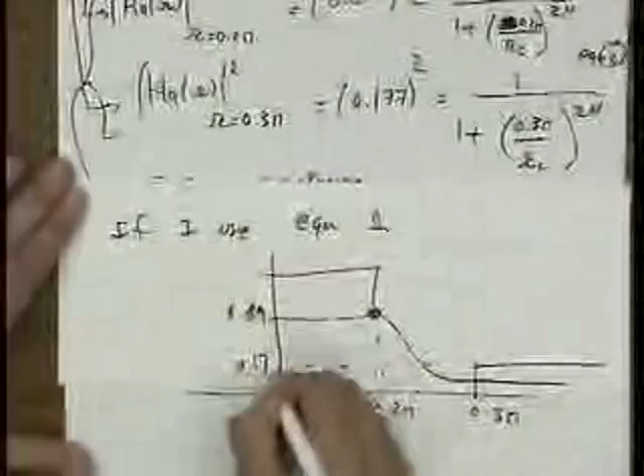What I'm arguing is this: here's equation 1, here's equation 2. If I use equation 1, then I pass through 0.89, and in the stopband I'm going to do this — 0.3 pi, 0.2 pi, 0.177. If I use equation 1, I get that. On the other hand, if I use equation 2, I get the opposite.

So here, I am over-satisfying the stopband. And here, if I use equation 2, I satisfy the stopband but I'm over-satisfying the passband. So here, over-satisfying the passband. What I'm claiming is that I'm going to choose this one, to minimize aliasing.

And once I do that, I just plug it into equation 1 up here, compute the new value of omega c, and I'm done. Essentially, I'm done.

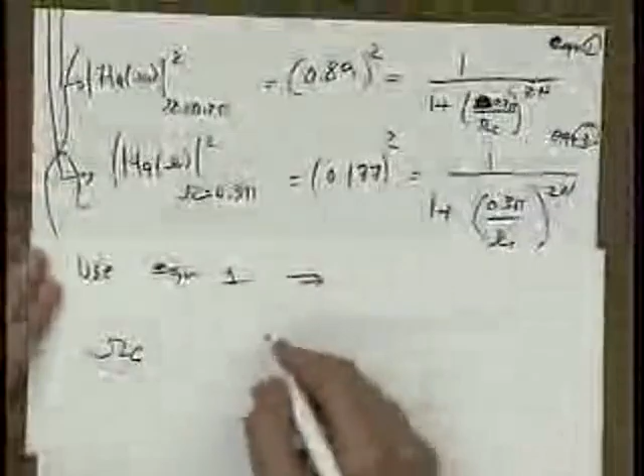So let me wrap up. Use equation 1, then compute the new value of omega c: 0.89 squared equals 1 over 1 plus (0.2 pi over omega c) to the power of 12, since we already chose n equals 6. That results in omega c equals 0.7032. So I'm done with step 3 — I designed my analog filter. I'll continue this discussion on Friday.

So as long as you come out with a filter and after you transform it back you satisfy the specs, you're done — it doesn't matter whether it's one-to-one or not. Okay, so my second question is — but when we do bilinear transformation, it will be one-to-one.